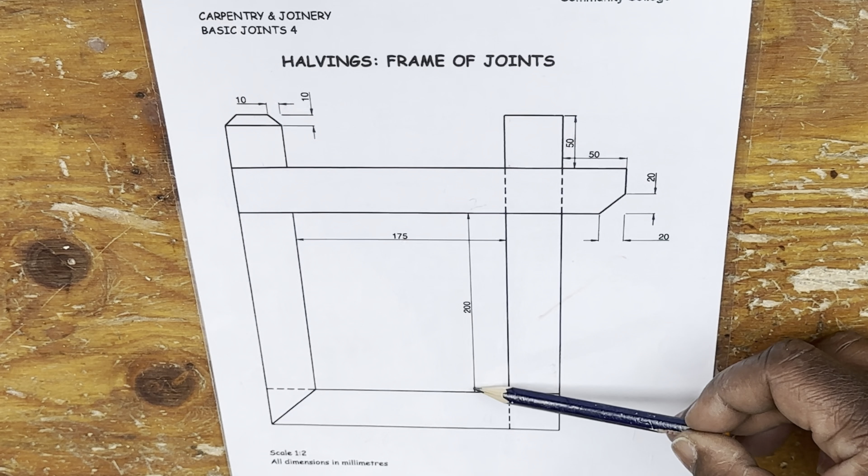Now, the tools required for the job we're about to do are a pencil, a ruler, single pin marking gauge, a tri-square, a mitre square, a 25mm bevel edge chisel, a claw hammer, a posi drive screwdriver, a smoothing plane, a low angle jack plane, this is new, a tenon saw, a cordless drill, a countersink, and a 3mm HSS wood drill bit.

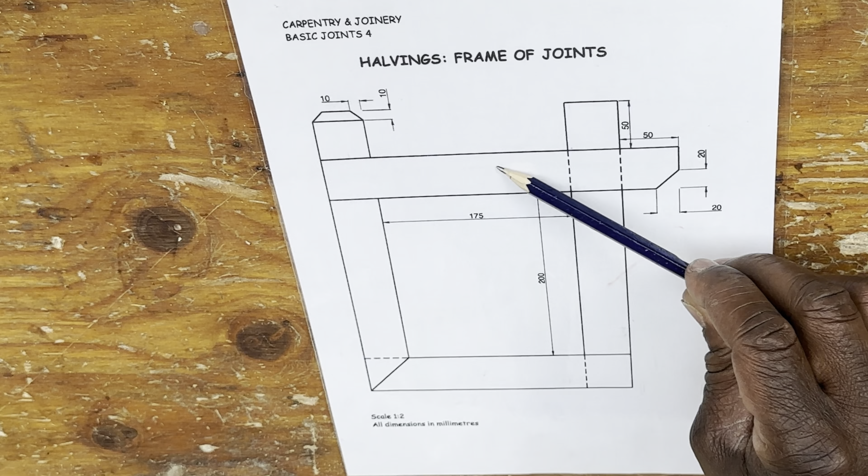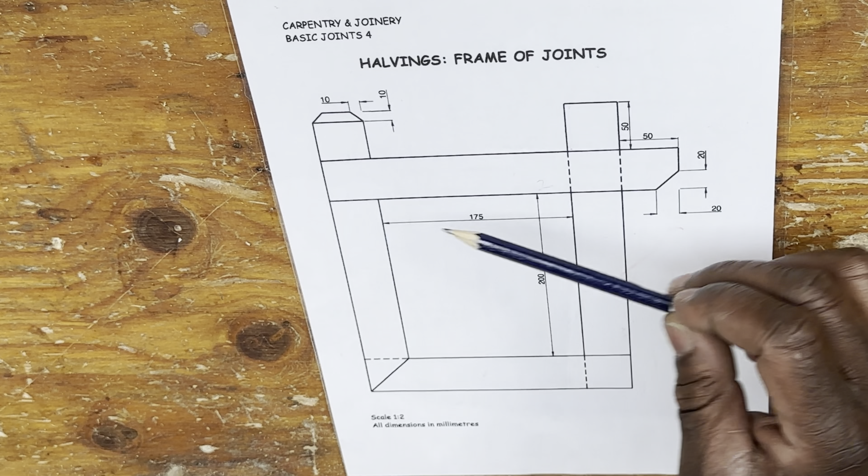Okay, so aids required for this frame of halving joints are: you need a cleaning up board like what I have here, some corner blocks just to keep the actual frame in position, F-clamp, 2 sash clamps, a shooting board which is set at a 45-degree angle, winding sticks, a squaring rod, 2 bench bearers, a bench hook, another shooting board but set at a right angle to the slope.

These are all aids that are required for the job in hand, and posi drive screws which are 3.5 by 25 in millimeters, or an imperial 1 inch by 6. 6 is the head. Posi drive screws required to secure the frame. And that is it. Materials required for this job is one piece at 700 by 45 by 28, and then another piece of timber at 600 by 45 by 28mm thick.

So firstly, we need to establish the 2 longest sides, 1 and 2. Now to do that, I got a dimension here of 200. I know that these pieces here are 45 and 45. So we got 200 plus 45 plus 45 plus 50. That equals 340. So our length of the 2 longest sides should be 340mm long.

So we need to establish the lengths of the top rail and the bottom rail in this frame. So the bottom rail, the length of it is going to be 45 plus 175 plus 45 equals 265. And then the top rail is going to be 45 plus 175 plus 45 plus an additional 50mm. That gives us a total of 315. Now I'm going to cut the 700 piece in half. So I'm going to measure 350mm long and then mark.